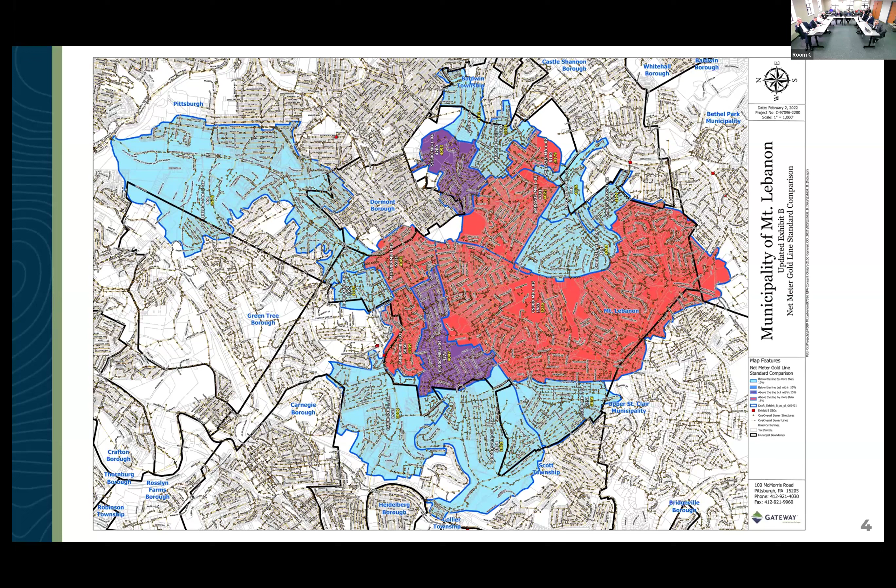This is a quick overall map. You can kind of see Mount Lebanon in the background, but this is blown up and includes your multi-municipal neighbors. This is a depiction of those points of connection. You see the red and purple, those are locations above the gold line standard, and the light blue are other sheds under that standard. Just trying to give you the larger feel of the municipality.

The corrective action projects - I believe I was here in November to speak about that. We got that out to bid toward the end of the year, and I believe it was awarded in January or February. In order to meet those corrective action requirements and get to the gold line standard, we had 4 points of connection that required manhole to manhole lining, which is CIPP - cured in place pipe lining. That's a way of putting a new pipe within the pipe.

Lebanon has done a great job staying proactive and ahead of this, lining most of the municipality. This targets areas with higher I&I, or inflow and infiltration. This was the low-hanging fruit we talked about, trying to stay in front of it. It also included repairing some manholes - a lot of older brick manholes within the municipality are ripe for additional flow making its way in between mortar joints that have failed over time. So it's a combined effort to do that work.

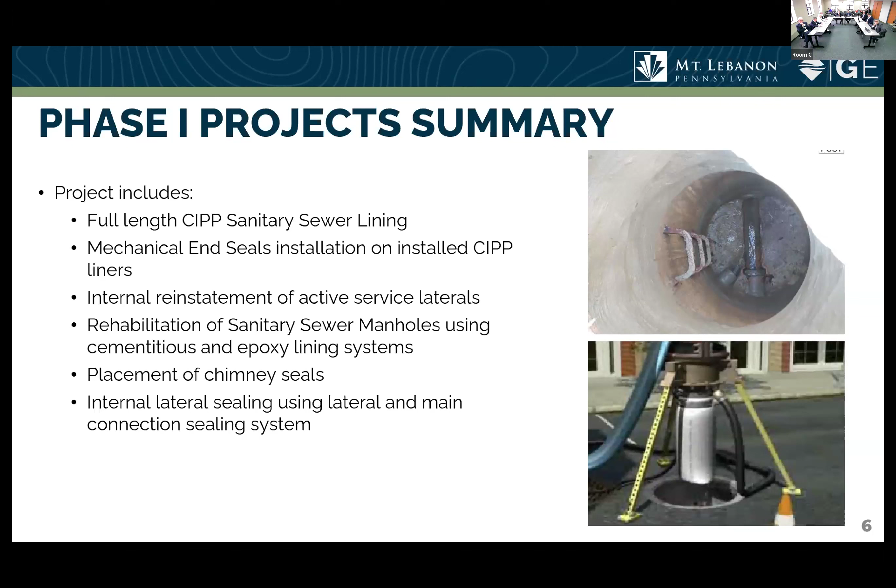That was a larger project, and we got it kicked off with the contractor. You may have seen State Pipe Services or Insituform throughout the municipality recently. State Pipe is the subcontractor to Insituform. They're starting pre-televising to evaluate all the lines to be lined. Next, they'll line those lines and perform the manhole rehabilitations.

Brief schedule for you - as mentioned, they started that pre-CCTV work, and they currently anticipate starting the manhole to manhole lining process sometime in the middle of June. They'll notify residents, as well as us and the municipality, when they'll be in town. Often when people are doing the lining, you'll get comments about a styrene smell, so you may hear that from constituents, but we try to take every precaution ahead of time to notify residents who could be affected by that work.

This project does also include GROW grant considerations, which I'll talk about a bit later, but this entire aspect did include GROW grants. Part of that grant requires performing metering during and after the project. The expectation is that meters would be placed in the ground prior to the middle of June, and anticipated to remain in the ground approximately 7 months - during and 3 months after work is completed. That's estimated at about $14,000.

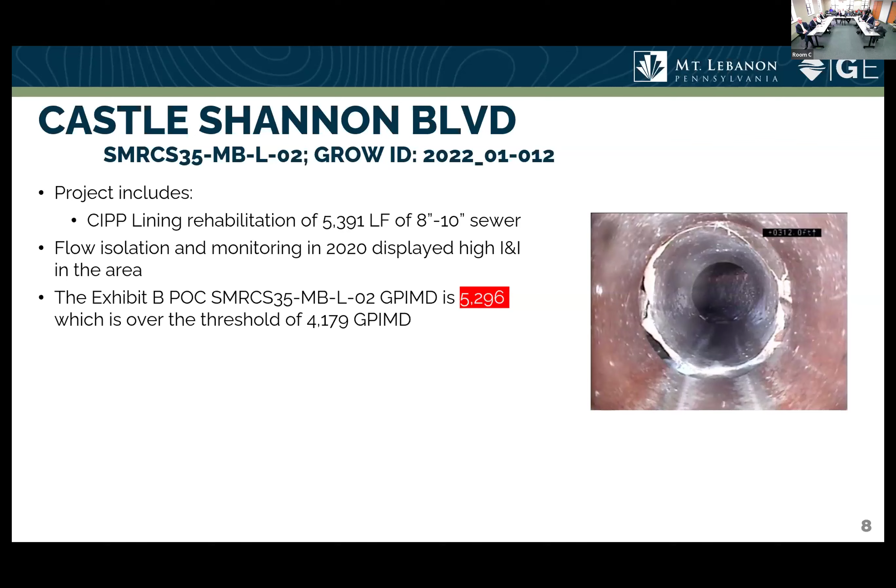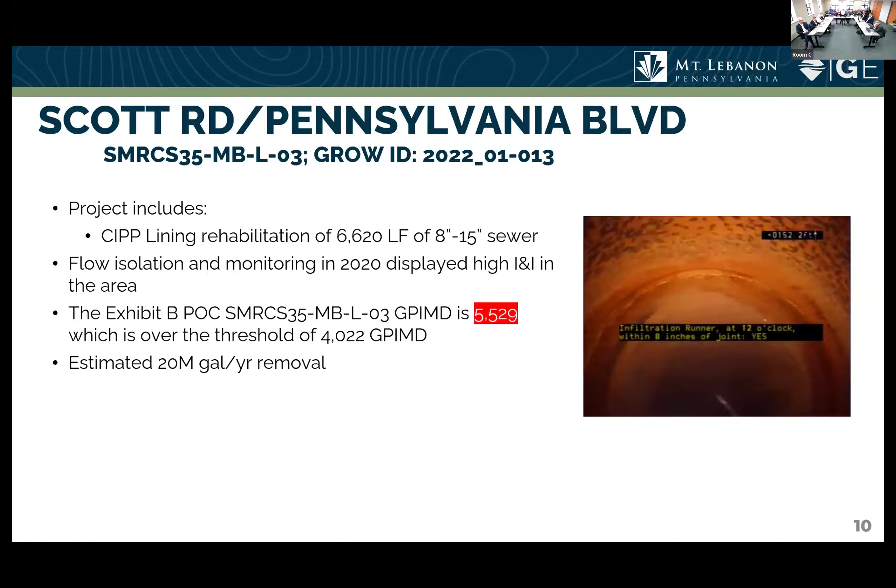Cochran Road, Larchmont Road — again, a little over 6,000 lineal feet of lining, 26 manholes to be restored.

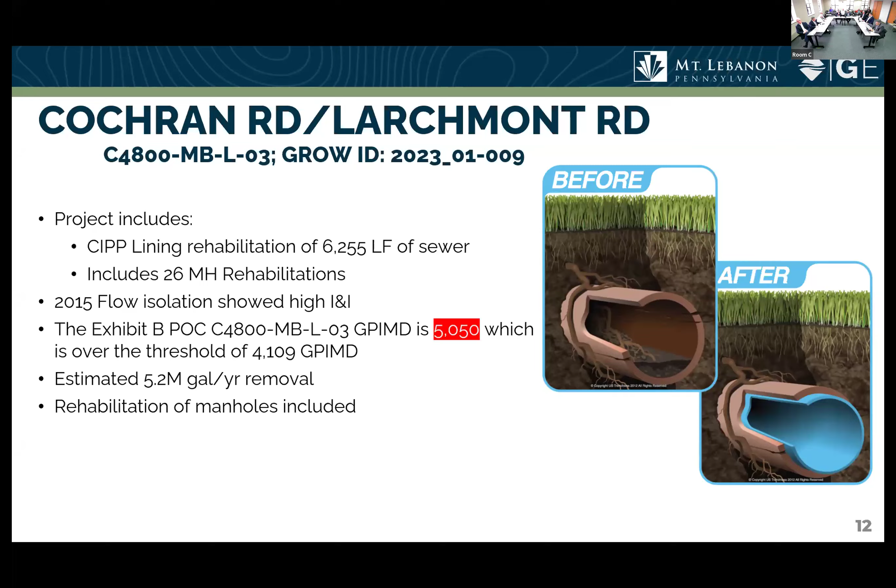That's a nice little image there too of the before and after of the CIPP line. I didn't bring my prop with me — I think you were at the LGA meeting where I had that. It is truly a liner, a pipe within a pipe. It starts as a felt tube and ends up becoming hardened like a pipe within the pipe. So that's the other benefit here: not only are we trying to remove I&I, but essentially it's repairing these sewers that were installed 70, 100 years ago that are now in disrepair or past their lifespan. So it's a twofold approach in terms of getting the I&I removal and replacing infrastructure.

And lastly, as part of this project was Little Sawmill Run. This was actually an image there on the side too of a cured-in-place pipe. That's closer to 9,400 lineal feet of sewer to be lined, with 50 manholes to be rebuilt.

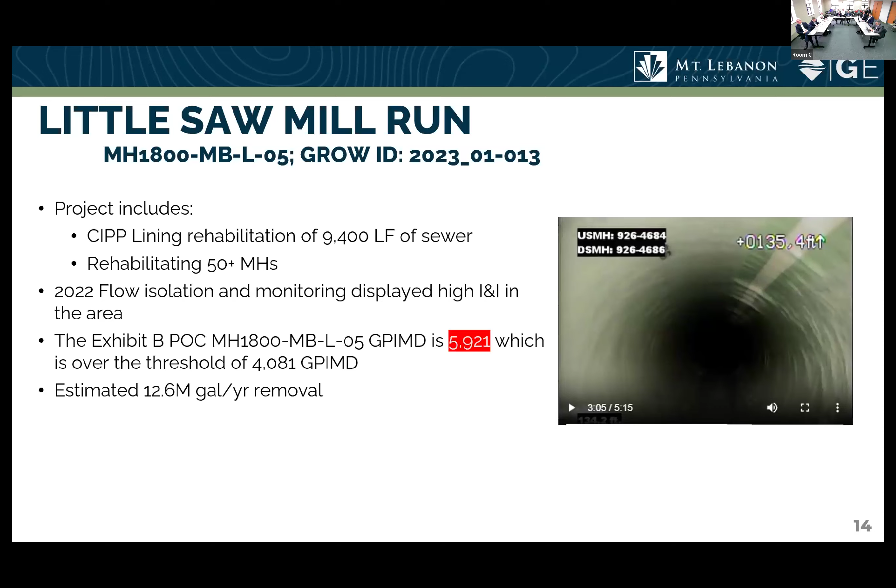Can I ask you a question? Do we anticipate that the lining for these projects will get us to that gold line standard, or is that a requirement — do we just have to reduce by a certain percentage? All great questions. Initially, there was the thought that it was only a 10% reduction. There was feedback provided that you do have to at least get to that threshold. In this case, the anticipation is that we would get to that threshold in these four points of connection. However, there is not a grading of whether you did or didn't get there. We're using our best sound engineering judgment, doing both lining and manhole rehabilitation — kind of a belt and suspenders approach — trying to give us the best chance of getting there.

But if for some reason you don't get there, we're only focused on the public side, not the private side here, so that's always something to keep in mind — we have blinders up to about 50% of the system. And that's just how the order is stated, that you would not necessarily get penalized for that. However, the next order is expected to just reduce that threshold, and most likely would just require that you have additional work that would need to be completed under that next order. Is that expected that the next order would reduce it?

That reduces your expected threshold, yes, that's kind of the expectation discussion so far. So that threshold that was discussed, essentially that gold line standard that was created, it's a formula based on how many inch miles, how much sewer you have within your system. That was developed where, in 2008, when they metered the entire county, 50% were above that threshold, 50% were below. So it was kind of the middle point, right around 4,000 gallons per inch mile day. That's how you measure the I&I.

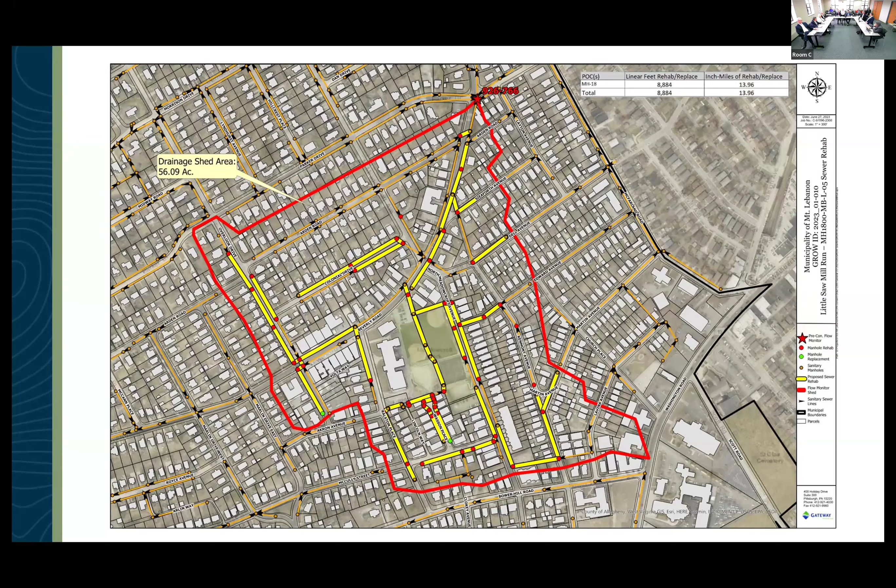Well sure, that's one part of it. I look at all these federal regulations as starting you in pieces and incrementally ramping you up. We've seen it with the NPDES permits, and we're seeing it now with the consent order. So we're doing the best we can within the confines of what we can do in the public system. Then if you go back and even do the private work up to the house, requiring over time all the laterals to be replaced to the house, what else is left?

At that point in time, you're talking equalization tanks, you're talking other larger structures somewhere in the watershed, most likely not in Mount Lebanon. Probably joint projects would have to happen near the interceptor source, because at that point in time, you've done everything that you can do.

So they don't want to wham everybody - is that a possibility? Is that like a potential reality that we could see?

I think part of the reality is that Alcosan's taking over all the interceptor sewers, right? That's where we're handing over the assets now - any multiple municipal sewers we're taking over. So they're going to control the keys. They'll control all the sewers all the way to their interceptor lines. So at some point in time, whether we do it or whether Alcosan does it through their rate system, they're going to build big projects along the creeks and the rivers to further lessen the flows.

And that's what we've seen in other cities - Detroit, Chicago, Boston, Columbus. I mean, you name it, they've kind of hit everybody. I think Pittsburgh's been such a unique animal for them, Allegheny County, given our number of municipalities and everything else. It's been such a complex issue to get everybody even to the point where we are now - it's amazing we've gotten here.

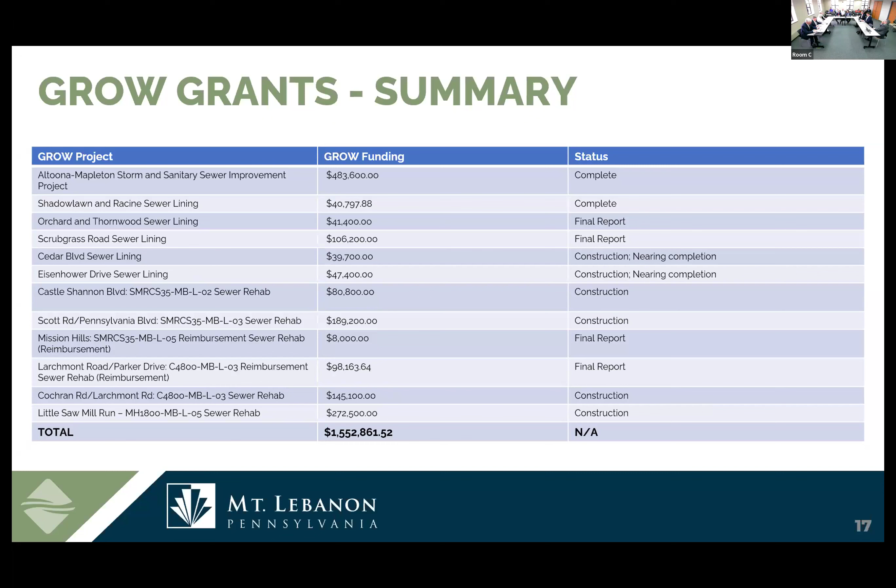We stay pretty close with Three Rivers Wet Weather, the regional entity, and Alcosan throughout this process to make sure we're bouncing things off of them. They look to Mount Lebanon as a gold standard, because there's so many communities I see that are just limping along, trying to do the bare minimum to comply. We're fortunate to have the density we have here with the size of the system, so it's still not overburdensome to our residents.

I think we're still using the same surcharge on Alcosan rates that we worked with Marcia Taylor on, probably 15 years ago. We have not raised the rate.

The other thing too, Craig, some of the calculations on a regional basis are also based on the total cost of the region. That was a consideration when they said what they want done. One way to think of it is what kind of storm, 2, 5, 10 year, are you designing for? They're not asking for a 100-year storm.

It seems like everyone's been working together, even though this is an order. I think that's not how it started though. It started with letters from the EPA that said you'll put flow monitors in the ground. Remember the 308 letters? That started it all.

It's come full circle. They understand the burden on the municipalities, and that's a good faith effort, as long as everyone's doing their part. Mount Lebanon has a huge part to play, having 17 different points of connection and denser systems. Only the city has more.

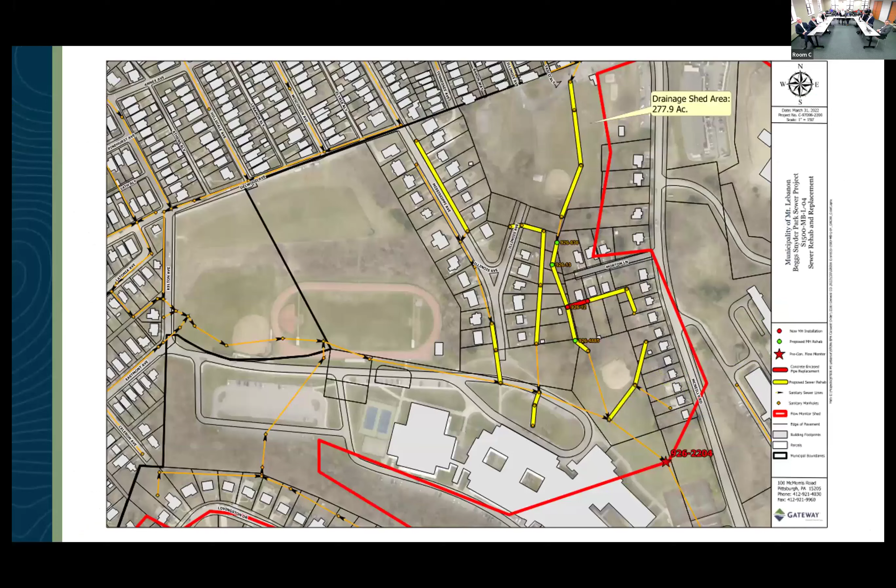The other 2 we submitted, Painters Run and Hope Hollow, were both reimbursements for work already completed. The only thing not completed was the post metering. Alcosan came back and said we'd have a much better chance of getting a higher percent reimbursement if we do the post metering first and resubmit under Cycle 10 next year. So we anticipate putting meters in the ground for those 2 and reapplying next year.

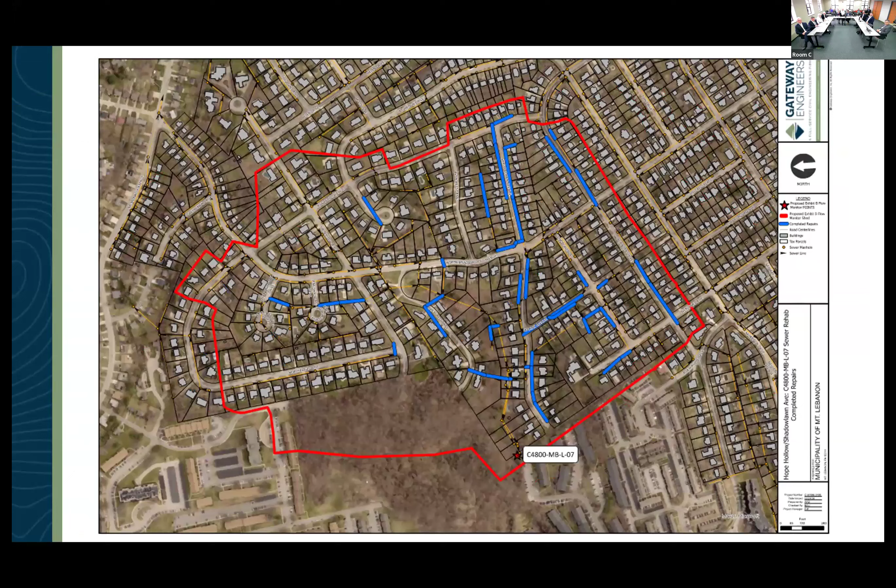And showing some of the lining work that has been completed.

Regionalization, I'll touch on this quickly. This was all sewers that were 10-inch and greater and multi-municipal. Anything in red on that map is what's proposed to turn over to Alcosan. They serve more than one community, and that's why you see it on the outskirts for the most part, all larger diameter pipe. Actually, that Beggs Snyder Park project is part of that northeast red section there.

But that's one that, at the end of the day, if you get both the GROW grant and the small water and sewer grant, essentially it would be completed at no cost to the municipality. So even though it's to be turned over to Alcosan, that work would benefit the municipality in terms of hitting your corrective action goals, and knowing that you still flow through those pipes, you want those to be good.

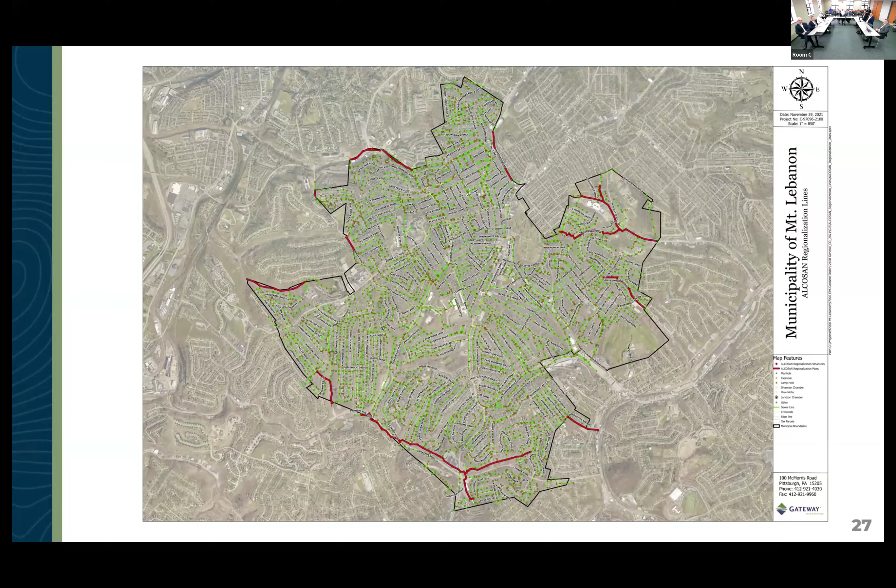The regionalization makes sense. The only questions I had were, one was legal. I'm not a lawyer, but I looked at that first contract they sent over, and Phil, we talked about it. It wasn't that it wasn't a serious contract, but there was just a lot in there that didn't make sense.

There were also questions like, have there been conversations about timing of fixes? Because if something happens now, we own these lines, we're pretty quick to fix or repair. What happens when something happens and Alcosan takes over? Do we have a sense of what response time is going to be? We're going to hear from residents if something happens, like we do now, and we're all pretty responsive here with the resources to get stuff done quickly. I can't imagine that gets better, so the question is, how much worse is it going to get? What does that look like?

That's a good question. I think they're staffing up to be able to handle it. Fortunately, most of the lines they work on are trunk lines, so they wouldn't be direct. We don't have a lot of direct resident connections to them. And if a trunk line is overflowing, it's usually an environmental issue where they have to respond immediately because it's flowing into the creek directly. So I would assume they'll have a response team.

That is a question they've heard a lot. Their response was that this is what they do every day, they manage sewers, so they have crews out constantly. But that is a concern, and Mount Lebanon is extremely proactive and jumps on things right away, and would make sure they're alerting Alcosan if it was one of their sewers.

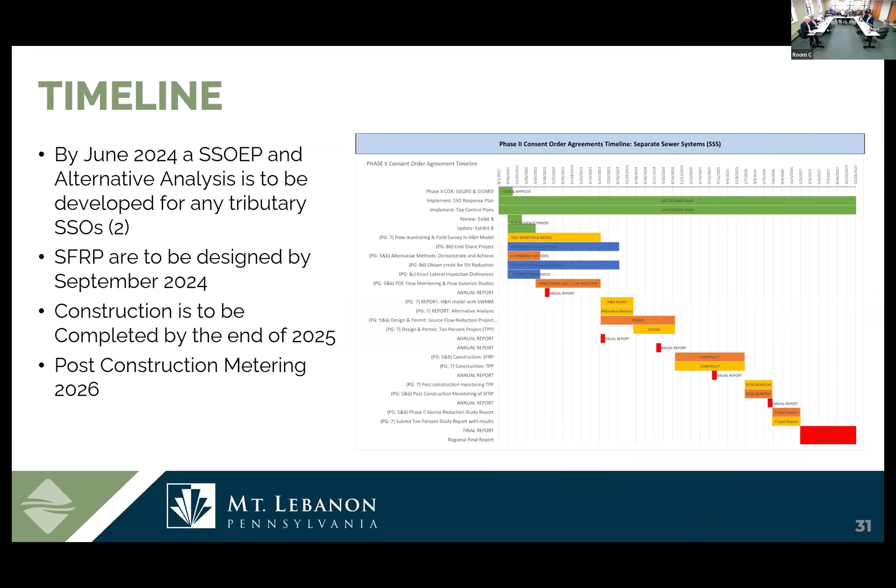So ultimately, their other point was they may not go in and specifically do that repair. They may decide to upsize that entire line instead. So there are other facets to it.

Lastly, for future next steps associated with it: submission of the SSO elimination plan reports, determination of source flow reduction projects, by the September deadline. You'll see a couple different reports that we'll be putting together for those. Those projects are all required to be completed by the end of 2025. We've already got a head start on a number of them. There will just be some more coming along the way. And then finally, the post evaluation in 2026 and the next order in 2027.

Great, good job. We can talk about sewers all night. I know, just can't help it. Zero, yeah, I like that. A lot of money. Despite the grants, it's a $3 million project. I know. A lot of sidewalk. Right, now programming, okay.

So we are here once again to talk about the main park site plan. I have John and Alex from Pashek MTR, the prime consultants on the project. Last time we were here, we talked specifically about some items for the rec center, but we want to get back in front of the commission to go through the current status of the main park site plan. We're honing in on some recommendations, and I think they're going to do a little bit of public outreach towards the end of the month just to get some feedback. One thing I want to stress as we go through this, because I know we're a little short on time and they have a lot to talk about: the overall goal of this project is to create the 30-year vision for the park. We fully recognize that not all the improvements are going to be installed all at once. The goal of this project from the beginning was to give the municipality a vision to work towards, so that as we make improvements to certain sections of the park, whether it's the playground area or the tennis areas, we know what our guiding goal is. So you may see some things that you think won't happen in the next 10 years, but maybe in 20 or 30 years, when that asset needs to be replaced, this is our vision for what we want to have happen in the park overall.

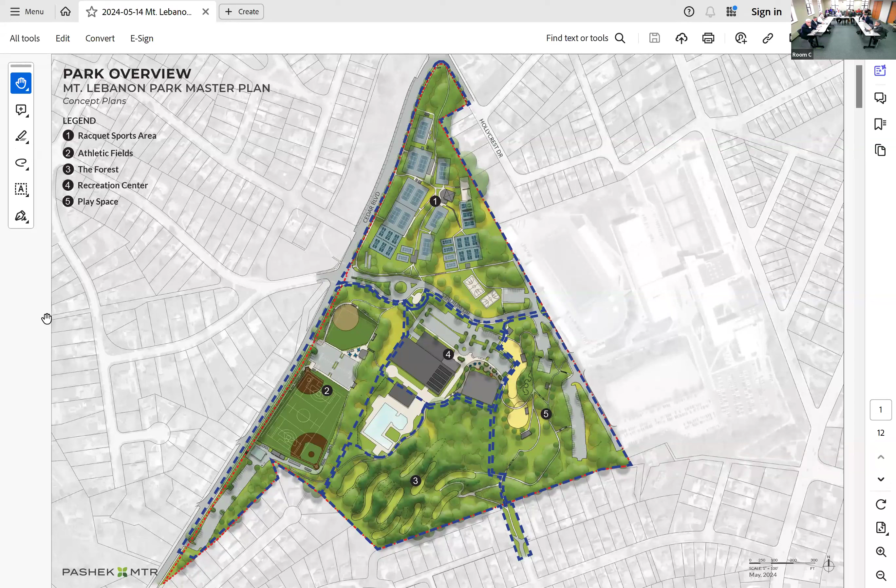It's the second time we met with the commission. The first time we talked about the overall park. We had recommendations, putting things out there to get a reaction from the commission. Now we've refined that to address some of the comments and concerns brought up, incorporating the rec center recommendations we developed with Draw Collective.

So today we're going to talk about 5 areas of the park: the racquet sports area, the athletic fields area, forest, the recreation center, and the play space. Next slide, please. Alex will describe the proposed improvements for each of these areas.

Note that for the first 3 areas - the racquet area, the athletic fields, and the forest - there is one concept proposed for each. For the recreation center and the play space, which you saw last time, there are 3 concepts for each. The reason is that for the racquet area, athletic field, and forest area, going through accessibility, usability, needs and desires, there seemed to be only small improvements needed to achieve the goals desired, so there wasn't a need for multiple concepts.

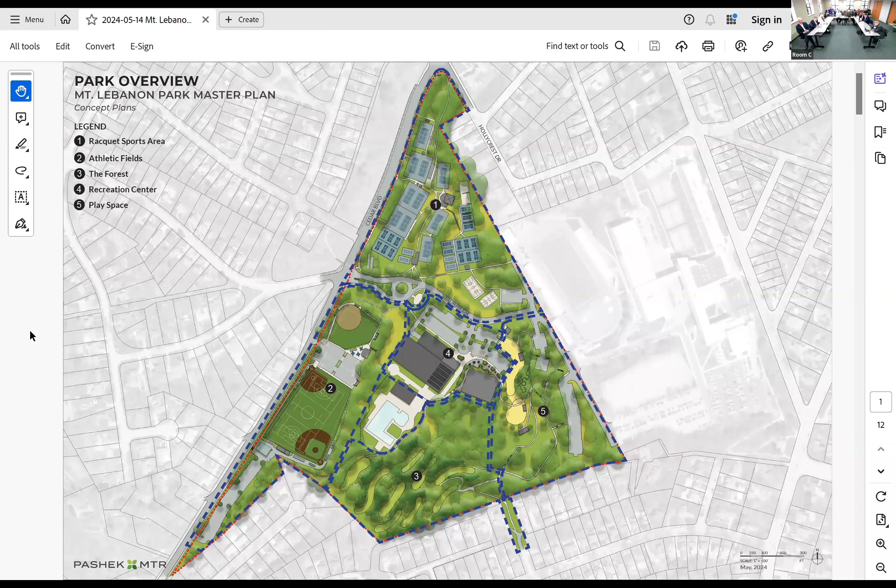So we'll go through the first 3, starting with the racquet sports area. The primary change for this area is actually in the entrance drive and in the corner. This park is in need of a grander entrance to locate it, because it seems kind of hidden in the drive. So we're expanding the circle, creating a sign area, and adding some planting.

Expanding the circle will also help redirect your vision when you drive in, so people won't drive up the sidewalk to get to the parking lot - they'll actually follow the road, which is the hope. At the Greenbrier intersection, that's really meant to be like a boulevard entrance and a gateway entrance that says you are here at Mount Lebanon Park.

And also to have a subsequent smaller signage at the corner of Hollycrest and Cedar to also have a park sign, to say this is where you are, this is here - just to emphasize that.

And with that, the area of field on Hollycrest and Cedar is an underutilized space, used a little by the church. We heard that some pickup sports happen there sometimes, but it could use a pavilion from what we heard, so we added a small pavilion, a pathway, and a shortcut connection that goes through to the rest of the court areas.

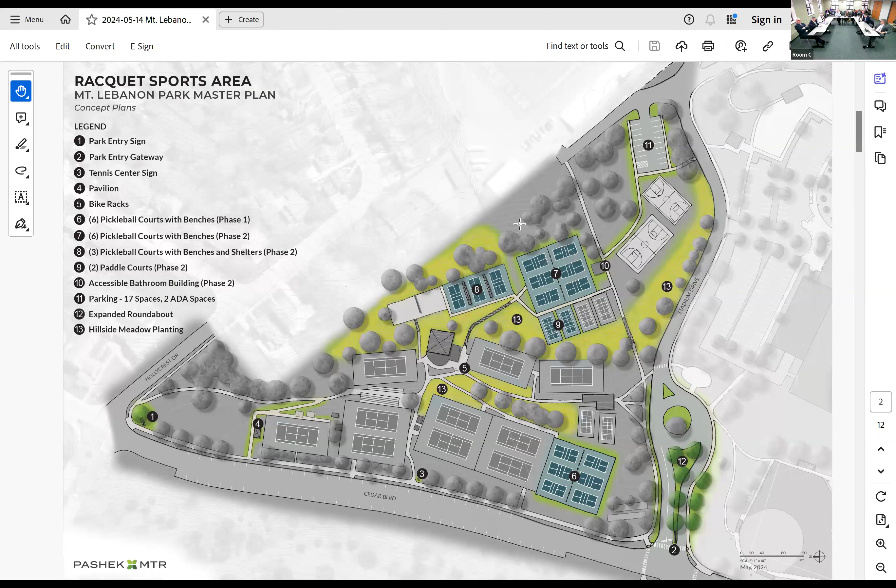Okay, good, thank you. So back to the racquet sports area, the yellow areas there are areas for these meadows. So there was no real thought to bleachering or doing other things on that hillside? I mean, again, I appreciate, I'm a believer in the meadows.

But just curious, it seems like there were potential opportunities to integrate with the pool, to think about other ways to integrate into the other parts of the park, to create more connectivity between the spaces, or with other spaces outside of these fields.

Yeah, it's a very steep slope and it's very difficult to get accessibility up that slope without creating fall line trails and erosion, even if it's hardscape. And so we do have a plan to redo this existing trail that is eroding into the hillside, to have accessibility to the back of the pool and to the wooded area, which we'll get to on the next slide.

And involve bleachers. We know a lot of people sit up here, like up on the hill, to look at this field. So that was the purpose of adding this number 2 bleacher here into the hill a little bit. I was like, having coached, I never saw anybody up there watching.

Well, we just saw like a little team. Maybe it's the scouts, yeah, there's just a little trail up here, almost like a user trail, and you can tell that people have hung out up here, because they've hung out along, yeah, maybe that's it. Yeah, I've seen them hang out around the left field line, but not up there.

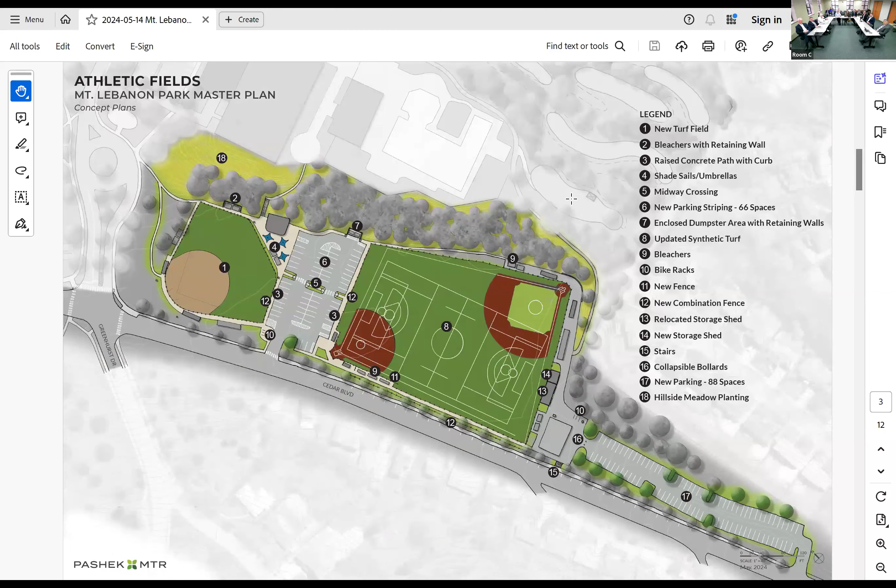You'll be surprised, this activity meets the needs of an age group that traditionally is underserved in the parks- teenagers, young professionals, college students, and the hippies that get out there and play. My son, who's 22, went to a glow-in-the-dark disc golf tournament last Friday night at a park, and they had 60 people registered.

It was their first glow in the dark tournament on a 9-hole course, and they're having 5 more of those throughout the summer at the park. He goes out 3 times a week after work with his buddies to play disc golf, and it's inexpensive—you're not paying greens fees or having to rent a cart and do all that kind of thing.

David puts a green fee charge on that. Well, I think—no, David, we need a beer concession. I mean, really.

A couple things. One, I actually liked the old trail, the trail on the prior design that wound down. I am concerned that the existing trail—I think the layout is essentially what it was before, or what it is now—and that trail is a hot mess, to Commissioner Silverman's point.

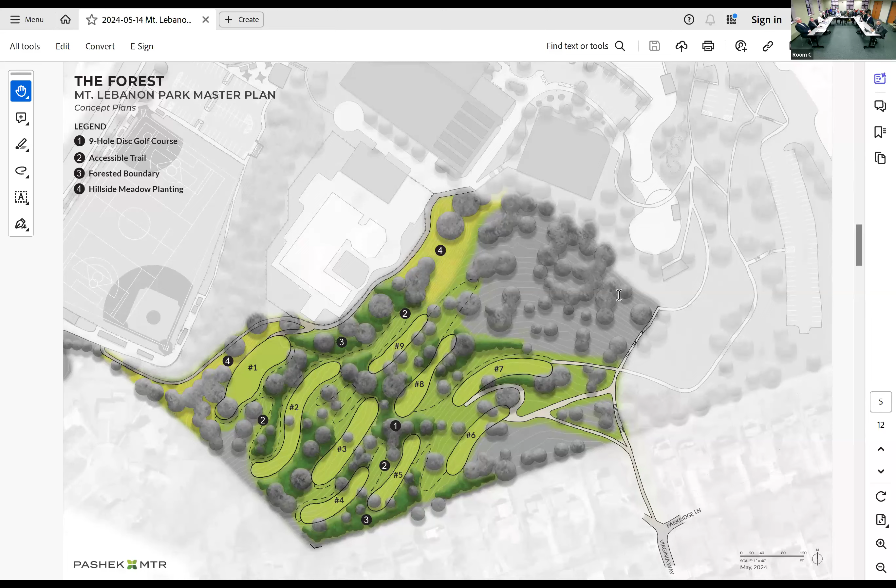Okay, we have half a dozen more slides to go through. We have 4 minutes. So the rec center — we discussed that last time. Let's skip over the rec center.

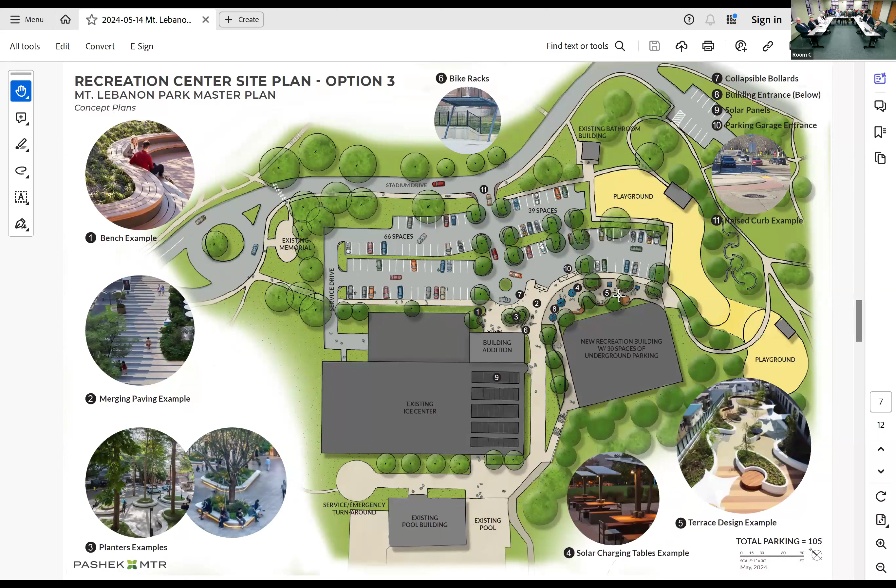This option, we just flipped the playground to the restroom side of the parking lot. So we took away parking here and put the playground near the restroom, because we thought that was more convenient. That's it on the rec center.

For the play space, we have 3 options. Let's go through them quickly, Alex. So we have 3 different layout options and 2 different theme ideas. The themes can be applied to any of these layouts. The layouts are essentially how to divide the space going up the hill.

This first one is to do small spaces and go up the hill slowly, winding a pathway through them. So there's a lower spot, some hill play, and a higher spot — this would be for 2 to 5-year-olds. Then the path winds around to an area for 5 to 12-year-olds, which would also have a lower spot, hill play, and a higher spot. So that's the area where it's small spaces going up.

This option combines everything in the middle, pushing the grade up and pushing the grade down. There would be like a meadowy entrance area that winds up to the center. With all the grade pushed up, the idea is to have a Mount Lebo volcano boulder dash type feature — a larger hill they could go up, again divided, with the lower space for ages 2 to 5.

We decided to go with a Mount Lebanon Blue Slide Park theme — double blue.

Ages 5 to 12, with a middle area for swings. This scheme pushes everything down closer, similar to the third option. The rec center scheme takes away some parking and puts everything on the lower level. This scheme has everything closer to the rec center, with grade added in the middle to keep retaining walls contained. This large area would be for ages 2 to 5, and the area including the hill would be 5 to 12.

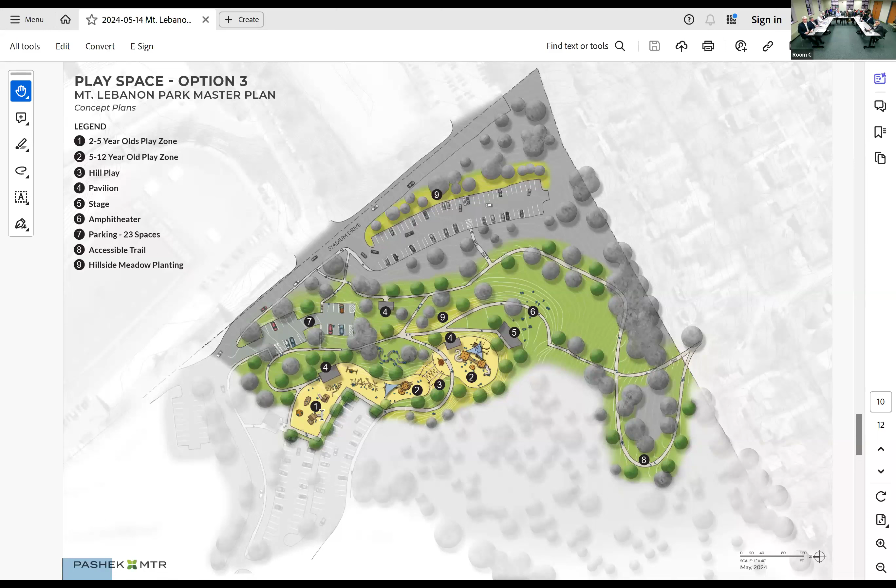Two more slides. These are the two different themes. The first is mountain themed, with an idea of stacking boulders and large slides. You can see in this bottom left how we can accommodate the change in topography.

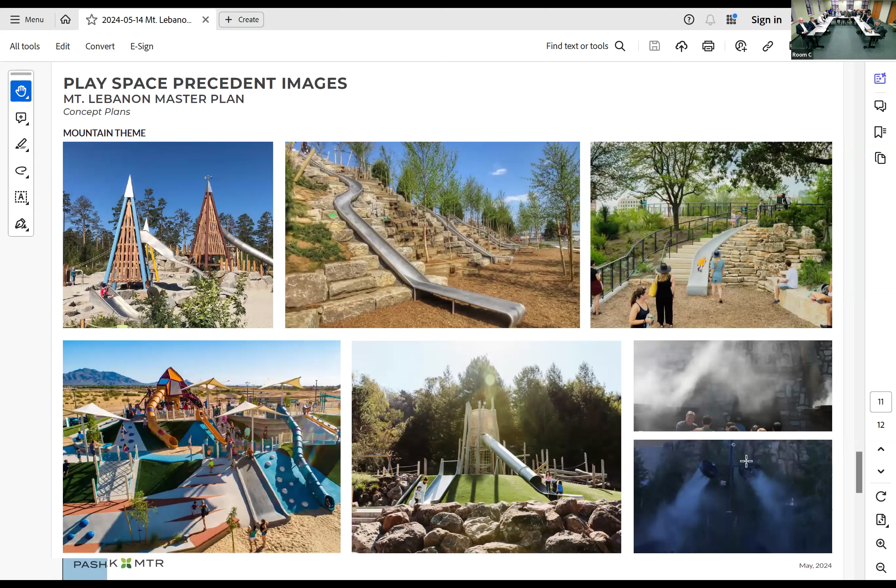Another idea is to have misters, possibly if we're doing the Mount Lebanon theme, like a volcano, so kids could push a button and it starts to mist or smoke. The other theme is a forest theme, since the park is very wooded. That's a popular element to keep going, with animals and trees nestled into tree spaces, as shown in these pictures.

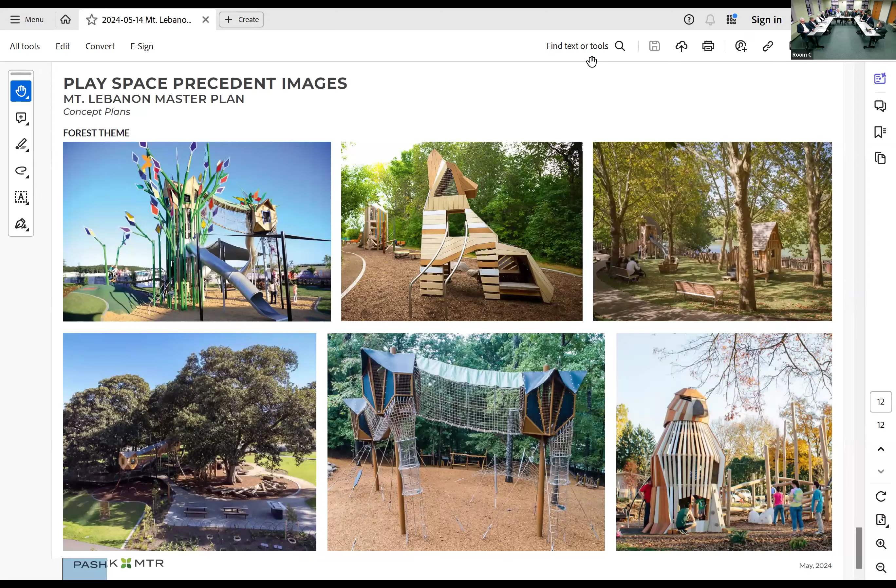So those are the playground options. Our plan is to take this out, set up a tent in front of the pool on Saturday of Memorial Day weekend to get input from the public on what we've presented tonight. If there's anything you've seen that is a no-go, let us know, because we want to drop that out and not present it to the public.

One quick question - in the first slide you mentioned the sand volleyball was coming out. Was that just lack of use? Yes, no use, and the maintenance is too high.

I'd be curious, because the residents who live above Utah Forest said they're going to watch the discussion session. I'm curious what feedback they get. I hope they watch it. I don't have an answer yet on what their take is on things.

We'll have more precedent images - we cut 6 or 8 slides from this, from our meeting with Ian and staff a week ago. Those precedent images, like seeing pictures of what a disc golf course actually looks like, help people start to relax and realize it's not as crazy as they thought it was going to be. So hopefully there'll be favorable feedback.